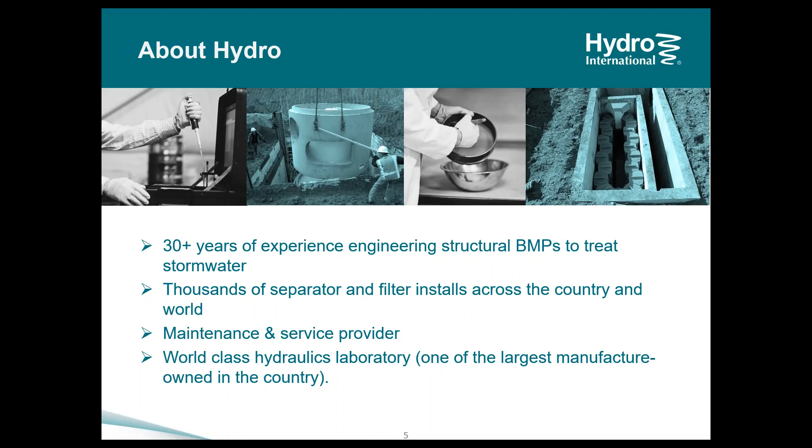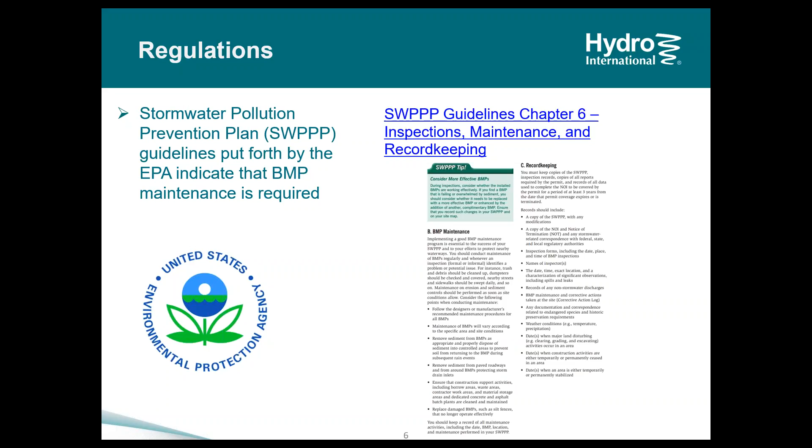So to start, as our starting point, we'll look at the Stormwater Pollution Prevention Plan, or SWPPP. These are the guidelines put forth by the EPA, indicating that BMP maintenance is required. This is to be seen specifically in Chapter 6. Now, this is often delegated by the EPA to the state or to the city or county level.

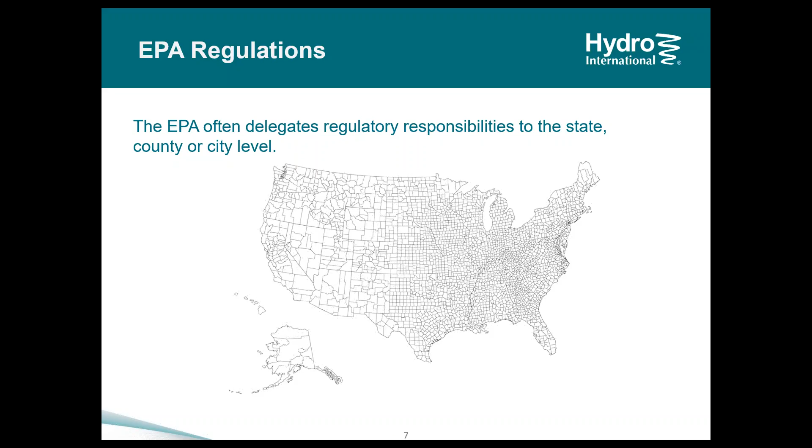So to further illustrate the point, take a look at the following six examples from the EPA Summary of State Stormwater Standards. The examples on the left are not the same level of detail as those on the right. This is just an example from the state-to-state level.

Now again, try to take a step out from your day-to-day and imagine how, as an owner, you'd be searching for answers about stormwater, and this could be confusing as to what your actual responsibilities are in terms of maintaining your BMP.

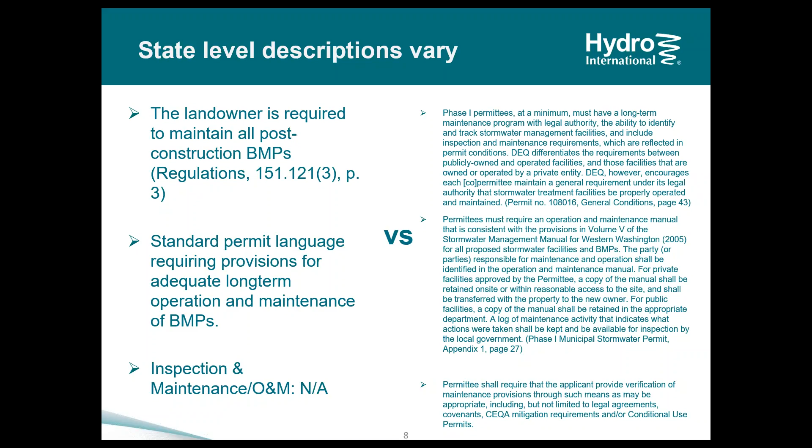Now, much of the regulatory effort is done on the front end to verify system performance. It's done prior to installation. A lot of focus is put on the site before and during construction. As a result, the audience, which in this case would be the contractor, is not necessarily the end user.

The result from that is that enforcement of post-construction BMP maintenance is in many cases reduced to a simple encouragement. And this is also communicated, or not communicated, to parties who really don't hear that message or don't really understand it. That said, stormwater BMP maintenance is not happening regularly across the board.

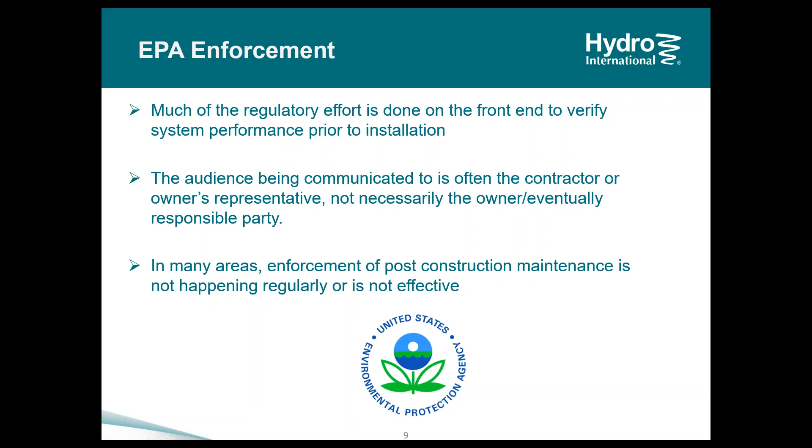A little bit of some maintenance statistics or what we have noticed. Between 6 months and 2 years, almost any stormwater treatment system that is not maintained will cease to provide any effective treatment level. In our business, we found that fewer than 5% of end users actually maintain their systems, with some numbers as low as 2%.

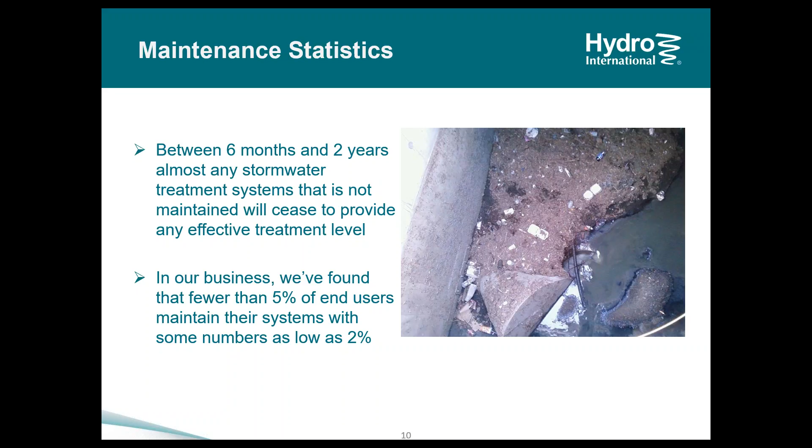Now when the maintenance is occurring, we find that that 2 to 5%, the majority of these are coming from the owners when something goes wrong, as you can imagine. Your parking lot floods and all of a sudden stormwater treatment and maintenance goes to the top of your priority list.

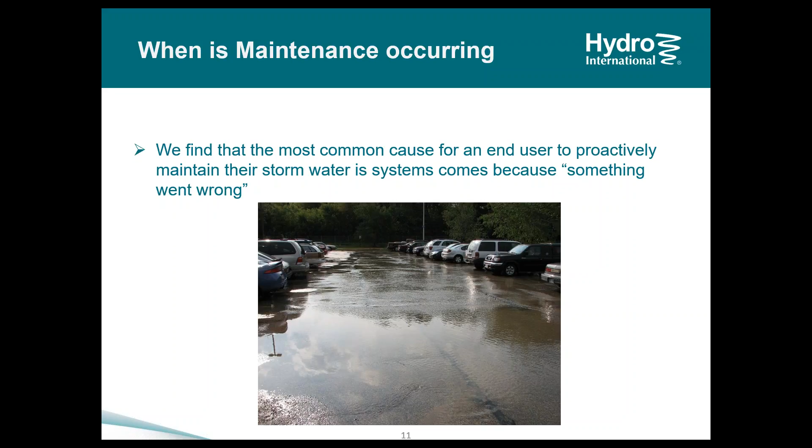The second largest reason for why we hear from owners and they're looking to maintain their systems is that they receive a violation, notice of violation or NOV.

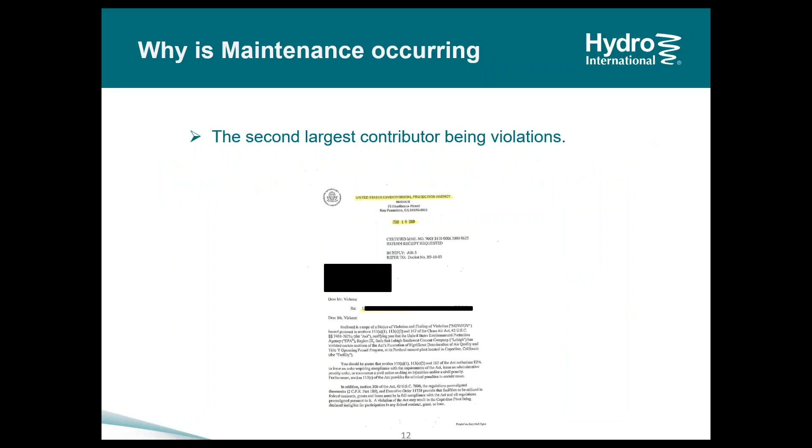The challenge itself is self-evident, probably already was before you signed up for the presentation. The issue is that stormwater systems are not being maintained in many cases. But let's take a closer look as to the why.

I've already encouraged you to take a step away from what you know and do daily. But let's take a simplified look at all the different groups and players on the stormwater board. Try to imagine what their goals and objectives are, and if they align naturally with stormwater maintenance or even the awareness. You have engineers and then contractors, developers, in some cases property managers.

Regulators enter here with the end user. These end users can be homeowners, it can be business owners of various sizes, small businesses, large multinational businesses. And you have to imagine that a homeowner's perspective and knowledge of stormwater is inherently much different from the head of, say, a public works department for a decent-sized city or municipality.

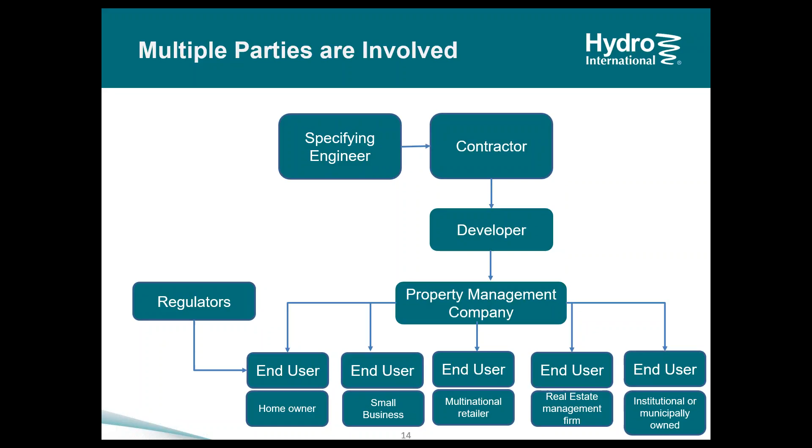So when looking at just the design, specification, and construction of a new site, there are, of course, a lot of people involved. Now, just in terms of the construction or reconstruction of a site, the stormwater can be considered something very small in scale compared to all the other aspects of what's being done. This, of course, doesn't help with the issue of communication and miscommunication about who's responsible and what's actually there once things are finished.

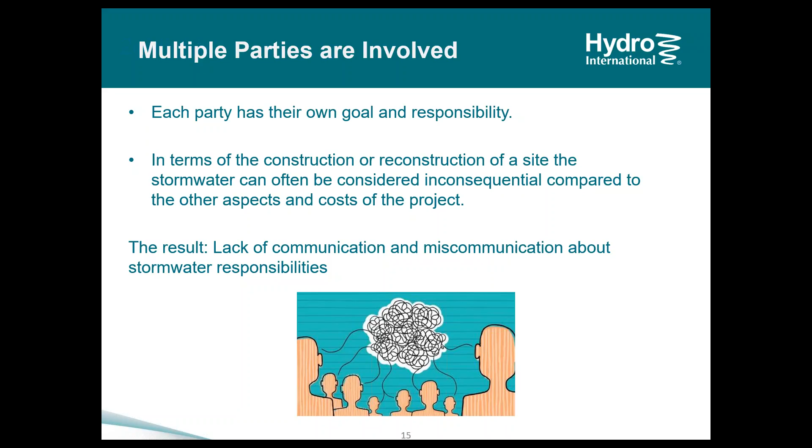So then let's fast forward to the completion of a site, take a look at the perspective of the end user or the responsible party who has the stormwater BMP or stormwater facility, and it's their responsibility to maintain that.

So these end users are from all different walks of life, from all sizes. The goal here is to look at a few examples from different areas, chosen residential setting, as well as small, medium, and large commercial settings. For this presentation, we won't deal with industrial permit sites.

Typically, these owners are actively engaged from the beginning, so we won't be looking at that. Additionally, we won't be looking at institutional or municipally owned sites. Again, these types of communities or organizations do have folks in place in regards to the overall operation and maintenance of everything, not just stormwater, but very often specific stormwater teams as well.

So that said, we will look at individuals, homeowners, an individual homeowner or homeowners association, small businesses, regional retail chains, as well as big box chains and multinational retailers.

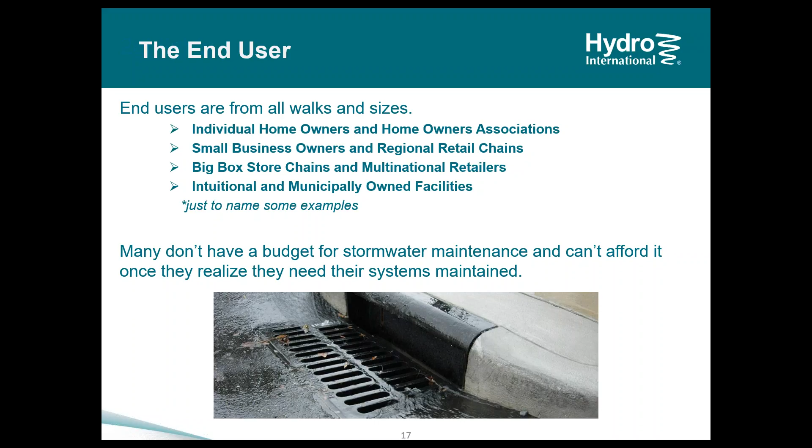So taking the story from a residential setting, these stories are sort of fictional depictions, but they're based very much on reality and things that we hear very often. But as a simple story, let's take John.

John is a proud homeowner, one of the new houses in Apple Grove community. Apple Grove is located next to one of the best schools in the district. Many young families have purchased the lots, and in fact, before completion, all of the lots are actually purchased by new homeowners. It's a very attractive area, not too dissimilar to the growing towns or suburbs and many of the areas close to many of you.

Now, the development is just finishing the third and final phase. However, the LID or low impact development and proprietary or manufactured BMPs were installed in that first phase as part of the utility construction. Now, these are several years past due on maintenance.

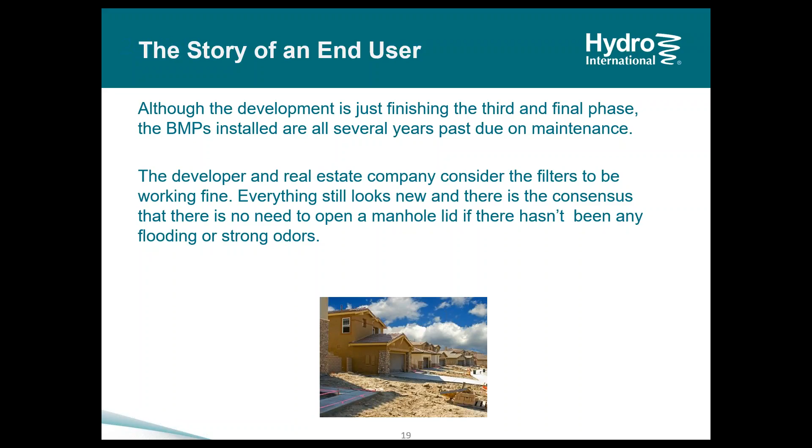Now, the developer and the real estate company consider, say, the proprietary filters or sand filters, separators, whatever it may be. They think they're working fine. Everything still looks new. There's a consensus that why would we open a manhole lid? There's no flooding. There's no strong odors coming from any of the manholes. So they let it be.

Once the development is completed, the area is handed over to the HOA. The homeowners association is now responsible for their neighborhood. After some time, John and the other homeowners receive a card from the town informing them that they're responsible for the stormwater maintenance in the development.

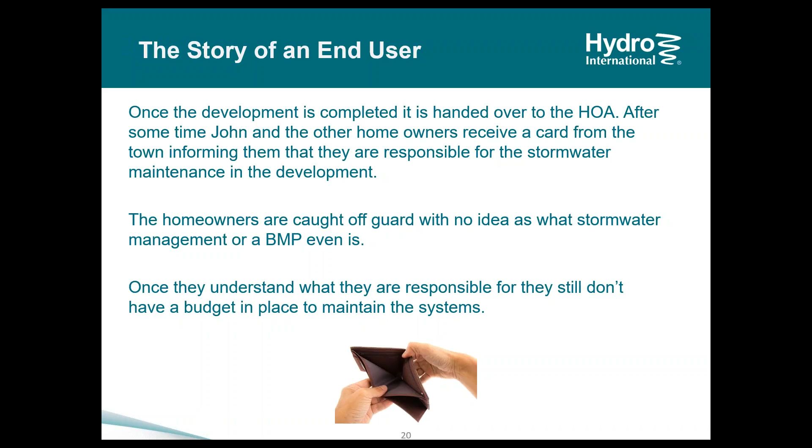Homeowners are caught off guard with no idea what stormwater management is or what a BMP is. They search around and ask, and eventually come across some paperwork that gives them a better idea of who's responsible and what's in the ground. Once they understand they're responsible, they still don't have a budget in place to maintain these systems.

After contesting over who is truly responsible for stormwater maintenance, they'll go back to the developer to see if they're responsible. What will eventually happen, though, is that a service will be contracted and conducted.

Now the cost of doing this is greater since several years have gone by, and there hasn't been any good housekeeping practices employed in the meantime, aside from your typical lawn care, mulching, and mowing.

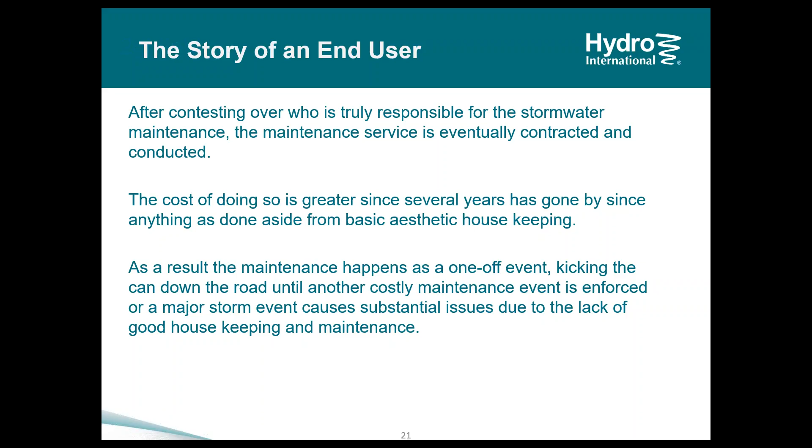As a result, the maintenance does happen, but it happens as a one-time event. This is kicking the can down the road until another costly maintenance event is enforced, or a major storm event causes substantial issues due to the lack of good housekeeping and maintenance.

That's not to say there aren't examples of diligent property owners and property management companies who are aware of their stormwater regulations and have budgeted and prepared for inspections and operational services. These examples are most common with property management firms, as these operational costs are part of their business, so they have a budget in place to handle this. This, however, is not the majority in the residential setting.

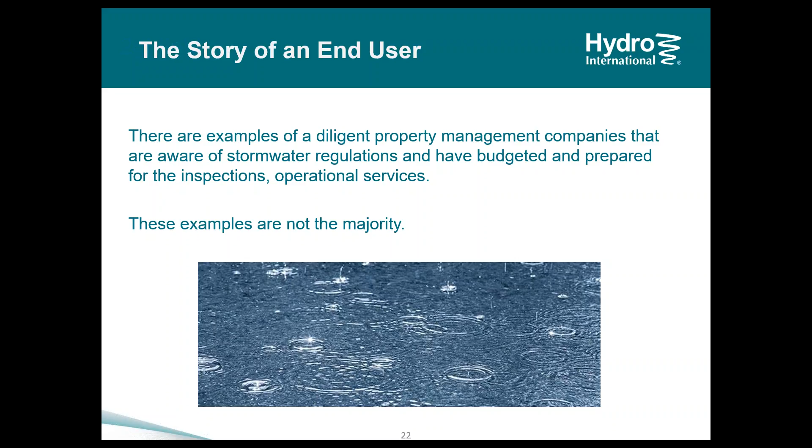So let's jump now to a small business setting. Let's take a look at Sam. Sam owns a local bagel shop. All of his money is invested in the shop, and his annual expense budget is already figured out.

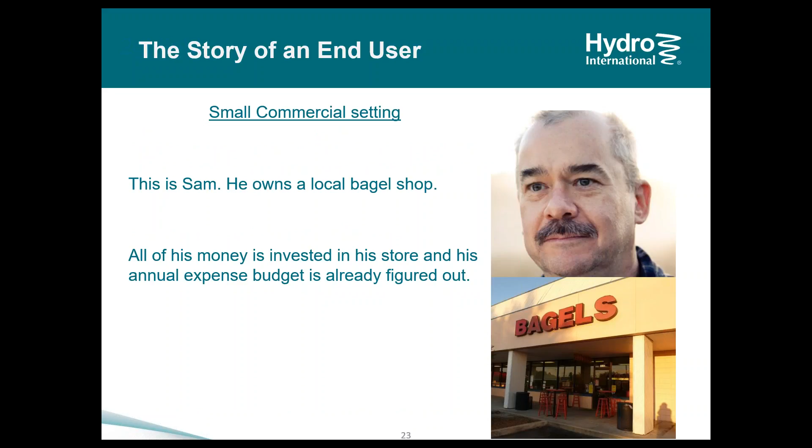One day, Sam receives a notice of violation, an NOV. At this point, the story starts to go the same way, and like the homeowners, Sam has a lot of questions.

Now let's say Sam has a gray or manufactured system. His questions are namely, I have a what? You'd have to imagine that a hydrodynamic separator is not part of the vocabulary of a bagel baker.

After he asks what do I have exactly, he probably asks why didn't I know about this? He then probably asks what is stormwater treatment, and what is a stormwater treatment system? Why does it have to be maintained, and why is it not self-maintained? What does maintenance even mean? And finally, how much is it going to cost me?

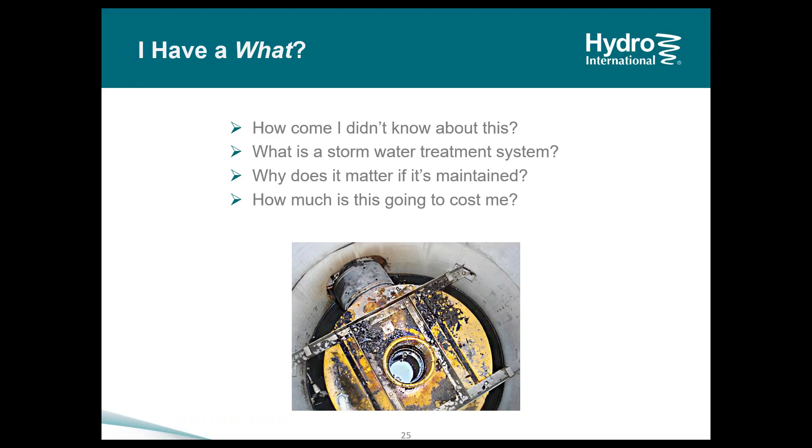Now let's say Sam has a green or low impact system on site. The benefit is that this isn't underground and therefore not out of sight, out of mind, so to speak. But his questions aren't too much different. I have a what? But we mulch and we mow around the signs out front, there's no pond out back, it's just trees.

This is something we hear quite a bit. Folks don't know they actually do have a pond on site, had a pond for years. You can show them the plans and they'll still contest that they don't have one, because these ponds aren't maintained. In addition, Sam may ask, stormwater treatment, what kind of treatment? This is nature, something similar to maintaining a ditch, what does that even mean? And of course, how much is this going to cost me?

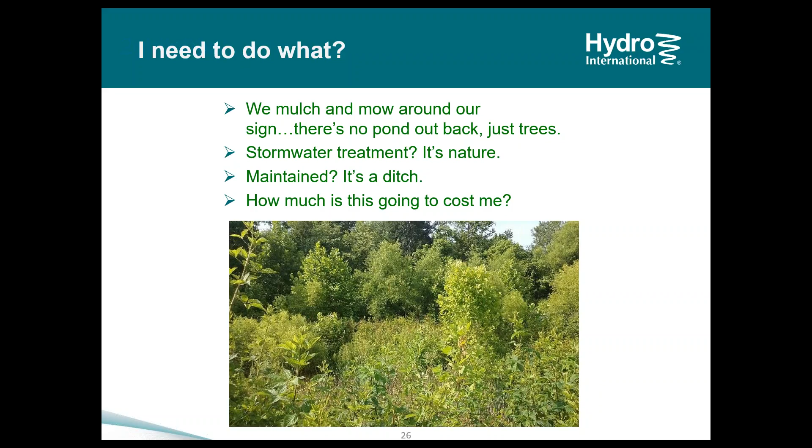Now Sam, similar to the HOA, will go and argue with the firm he rents from about who exactly is responsible for the stormwater systems. Not having a budget for this kind of operating expense, maintenance will get done, but it will be a one-time event, unless or until the local regulating bodies circle back around and tell Sam it's time.

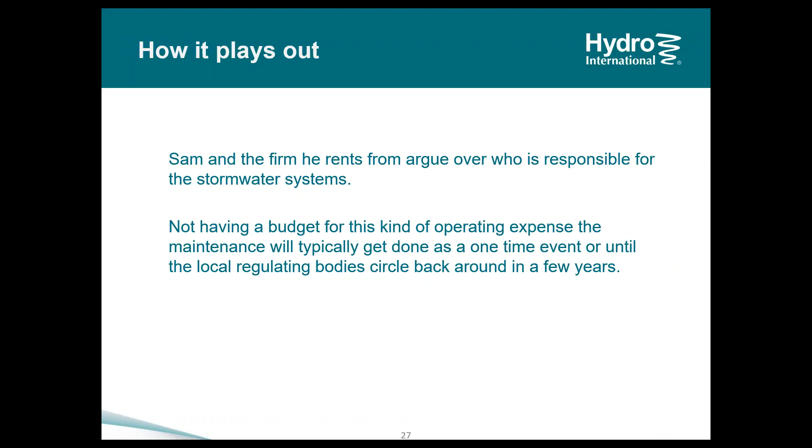Let's take another step here and put ourselves in the shoes of a scenario involving a small or medium-sized business.

You can probably think of a few examples in your local areas, companies that came out of the recession strong, helped the local area get back on its feet, and created a lot of jobs. We've seen pretty often that this ends up being c-stores, convenience stores, gas stations, things of that nature.

So let's take one that's expanded across a good portion of the state, has started expanding into other states, and is doing relatively well.

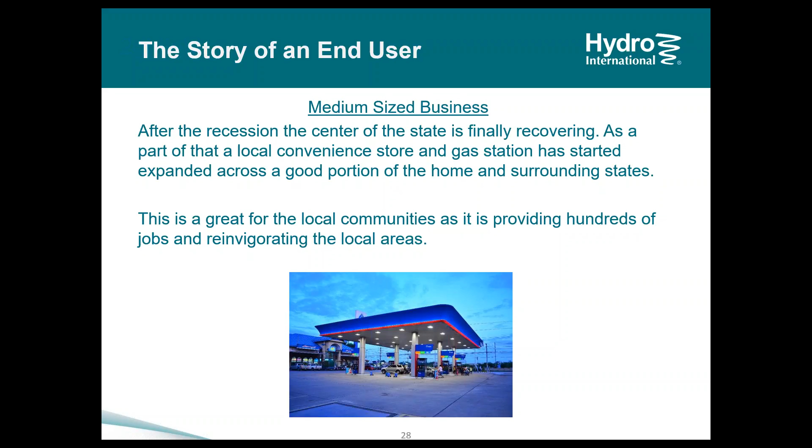As part of that, multiple locations are being built all at the same time. This growth is due in large part to a partnership between the design and construction process, streamlining what's going into these sites, and it's helping to allow growth and expansion.

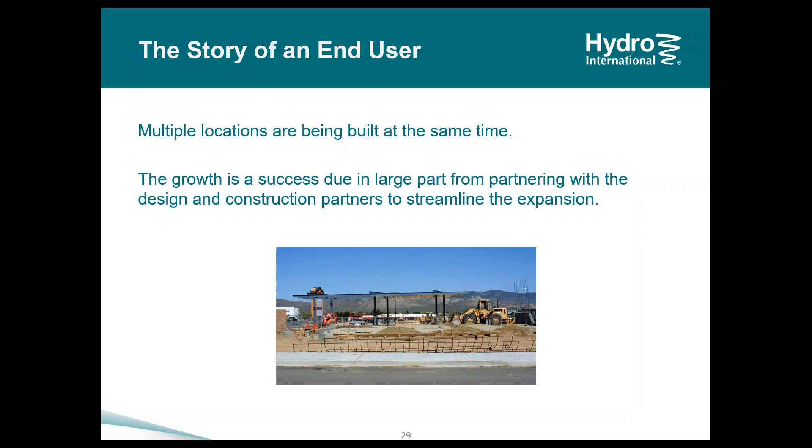So the first series of construction locations now are going about one, two, three years with occupancy. And as part of that, they're gas stations.

Very often they may have a proprietary filter system. These filters are no longer effectively treating runoff, as it's been several years. And what was designed as a small retention pond out back is now a series of overgrown shrubs and bushes.

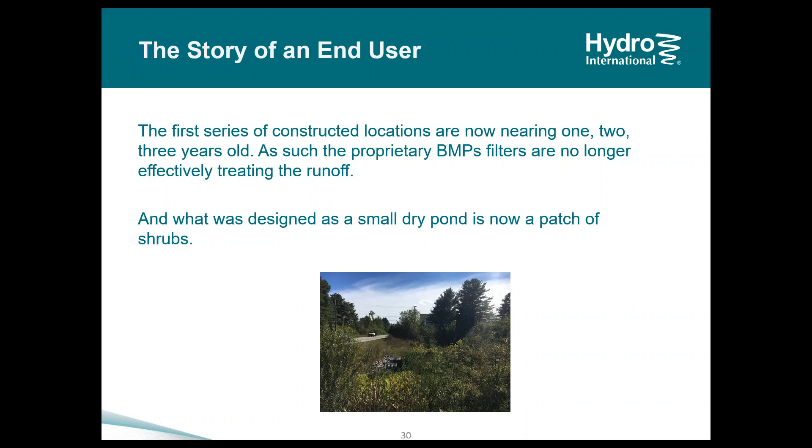Now, there may not have been any notices or notifications from the local body, but the regional construction distributor, who was part of that streamlined building process, reaches out to the construction manager and offers to supply the proprietary filter replacements.

Or anything else that may need to be purchased to maintain the systems on site.

Now, you can probably guess the response, or the lack of a response, at first. The construction manager is simply not interested in replacing or servicing stormwater systems.

That's quite frankly not his goal. His goal is to get these stores built and keep costs down. The only potential unbudgeted expense he's concerned with is the potential for an oil spill that needs to be cleaned up. Not even in his line of sight is rainwater.

Now, again, this is not to discredit the responsible business chains out there that plan and maintain for stormwater. For some of these companies out there, they've received an NOV or two.

With that violation, they said, okay, enough's enough, and they've overhauled their system and their budget, and they treat their stores and they maintain their stores.

For others, maybe they are trying to promote increased sales through their green initiatives. Stormwater falls in line with that, and they're being proactive.

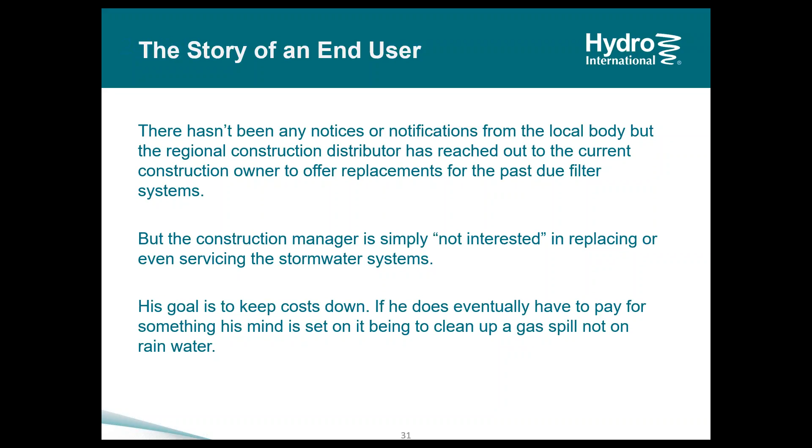So my point is that it's not to say that there are not companies out there that are maintaining, but again, the point is that there are not very many of them that are.

And for our last example, from a commercial setting, let's take a large box store, large retailer.

Typically, these retailers will be fined. They'll receive notices of violations. They're seen as having the funds to comply, even if they haven't budgeted for it. So they end up receiving violations.

Now, in response to a violation, this large retailer will bid out maintenance on all of their stores nationwide.

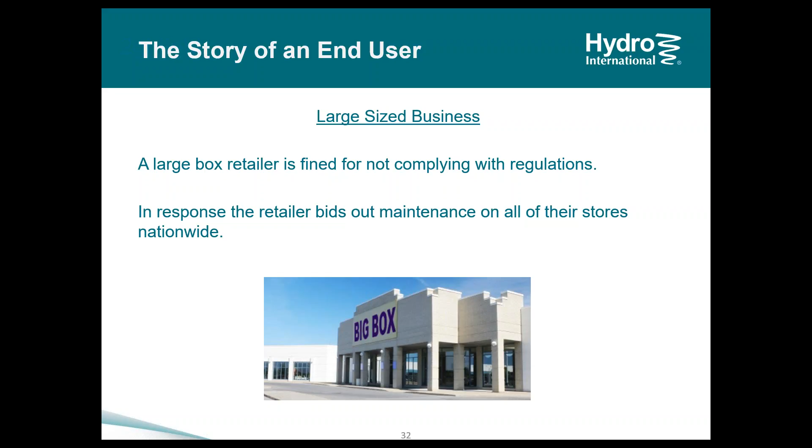And after a year or so of maintenance, not connected in any way, it's completely unrelated, but perhaps there's some consecutive quarters of down sales.

So the result of that is that the stormwater contracts are either done away with completely, or they're downgraded to aesthetics, to mulching and landscaping the front of the stores, anything to save costs, and so therefore this has become secondary.

Now, the maintenance contractors in response will try to maintain their contracts. It's probably a sizable amount of the work they do. They'll try to keep on maintaining these systems, but they won't get any cooperation from the corporate office or from the individual stores or regional managers.

And this will continue until this large retailer receives another violation at some point in the future.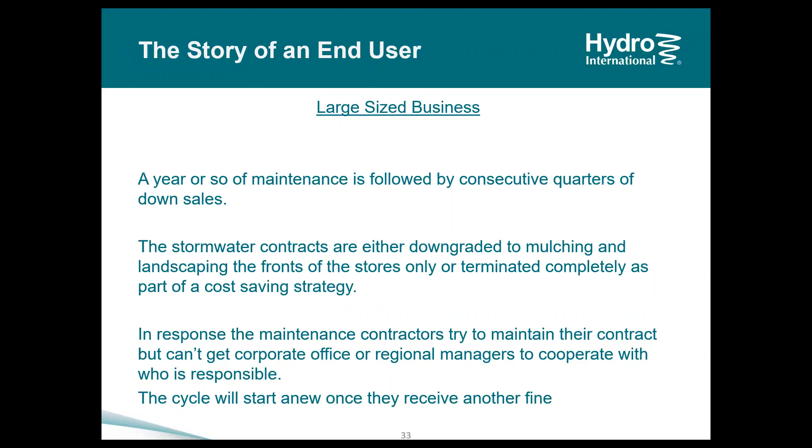Now, the difference with that is they're okay with the violation. They're okay with paying the fine and doing just enough to get by. That's because continuous stormwater service on all their sites may be more expensive, considering their footprint, than paying a few fines as they come up or maintaining a store here or there.

Now, as a side note, it may be easy to point the finger at large retailers, and that's really not the intent. In fact, if you were to look for a site that's probably not in compliance, it may not look like it at first view.

The parking lots are always well paved, have seal coats, freshly lined, and look very clean, especially considering the size.

But what you may not notice, unless you really look at what's there, is that there is a large amount of trash usually in these larger parking lots, these larger stores. Catch basins will collect no short number of cups and wrappers.

But in addition to that, if you talk to any maintenance companies who've ever worked on these types of locations, they'll be the first to tell you that the basins and separators and units installed on these sites are some of the dirtiest they see. And there's a few reasons for that.

One reason most folks don't think about, but is most interesting, is illicit discharges that come from campers. If you've ever driven past any of these big retailers, especially between state parks or in rural areas, campers tend to park there overnight, and stormwater catch basins tend to get used as individual or personal septic tank disposals. So there are things that go on completely out of the realm of many folks who are specifying or putting together these systems, but they're happening nonetheless.

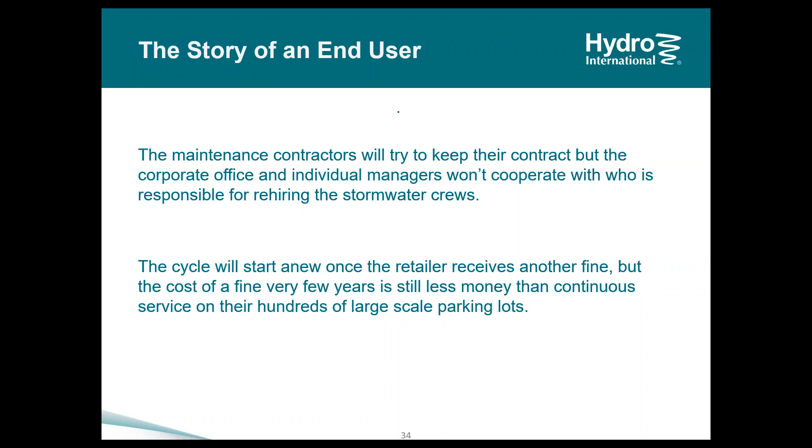So the question now is, it's getting better, right? Well, the answer is yes. This isn't all supposed to be doom and gloom. It is getting better. However, these things don't happen overnight.

Awareness is growing and it needs to grow. We, as a company, are seeing an increased approach from owners asking us about their obligations and what they need to do to clean their systems. I will admit this is a very small percentage, and that those who do come to us have almost no frame of reference for what they actually have.

They've seen the manufacturer's name on the manhole lid, and they know nothing more. They don't have a SWPPP. They don't know what they're responsible for. They do know that they have to do something, but they don't know much more. But this is something we can all build off of.

Now, to get started, to build off that, we need to recognize that regulations do not equal enforcement. Within a state, the regulations may be very progressive in terms of stormwater quality and what's expected, but the enforcement of that is another issue completely.

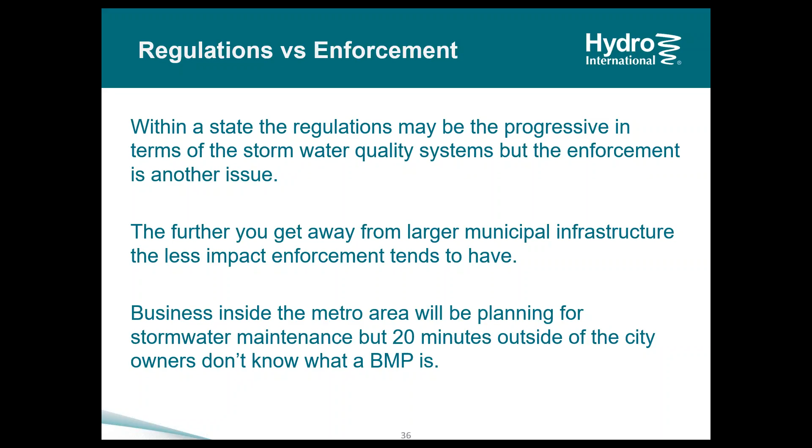This may not be something new to many of you, but we find that the further away you get from a large metro area and a large municipal infrastructure, the less impact enforcement tends to have. Many of you can probably identify that in your own states, where in some city areas there are very progressive systems in place and maintenance is being done, but you only have to drive 20 minutes outside of town and no one's ever heard of what a BMP is, even though all of their properties have them.

Now, the other thing here is to recognize the difference between forced compliance and voluntary compliance. Does maintenance cost money? Yes, it does. But spreading awareness of this across the various responsible parties helps to manage expectations. People won't be blindsided by this.

Most folks do want to do the right thing. They do want to maintain their systems. They just need to know about it.

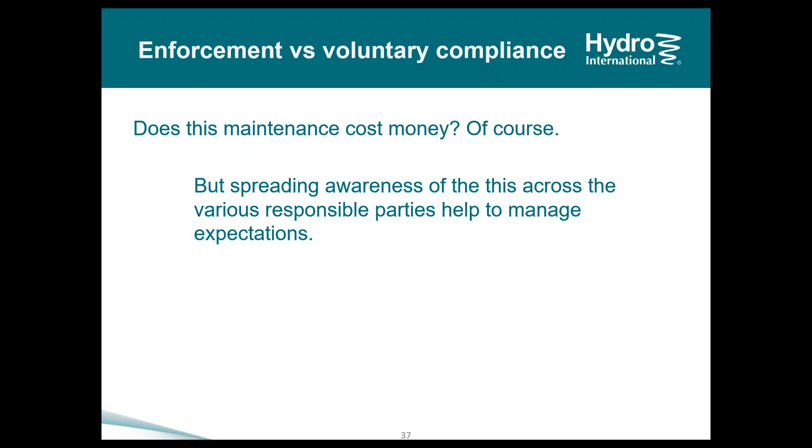Just think of the last time, the look on the last person's face who you explained stormwater treatment to. You can almost envision the moment when the light bulb goes off for them, where they connect all the dots about how serious and how interconnected everything is with the storm drain. So think about that, and think that inherently, people do want to do the right thing.

So what most of you are probably pretty curious about from this session is, how does it work exactly? The how on maintenance.

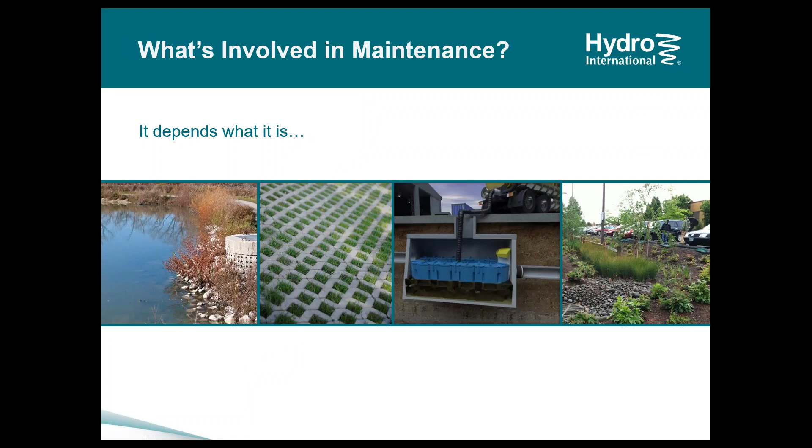That actually depends on what it is. There's no shortage of different types of treatments for stormwater, and so depending on what that is will depend on the how and the what. So what's involved, again depending on what it is, could be anything from simple housekeeping practices, mowing, de-weeding of areas, to heavy machinery.

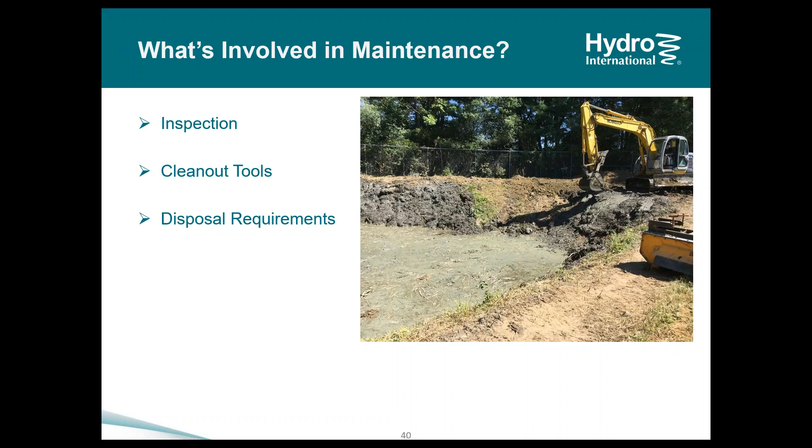So to break it down a little bit more, let's look at three primary parts here: the inspection, the tools or equipment, and disposal and the other things that go along with a maintenance service. So these will be the three things.

So we'll start with an inspection. The inspection is key. Now, most plans will say that a site should be inspected within the first year at varying intervals, anything from every 2 weeks to every 6 months to once a year, depending on what the system is, what the regulations are, what the engineer has suggested and recommended. What we find is that when owners do contact a manufacturer or service provider and ask what they need to do, it's usually well beyond that 6-month window that most manufacturers or regulators suggest for at least your first substantial inspection.

Now, the inspection itself is key in determining a few things. First, the current condition of the BMP facilities, which should help to estimate the maintenance frequency. By measuring the sumps, inspecting inlets and outlets for blockage, you can get an idea of how often this should be done and what to expect when having to do a maintenance service.

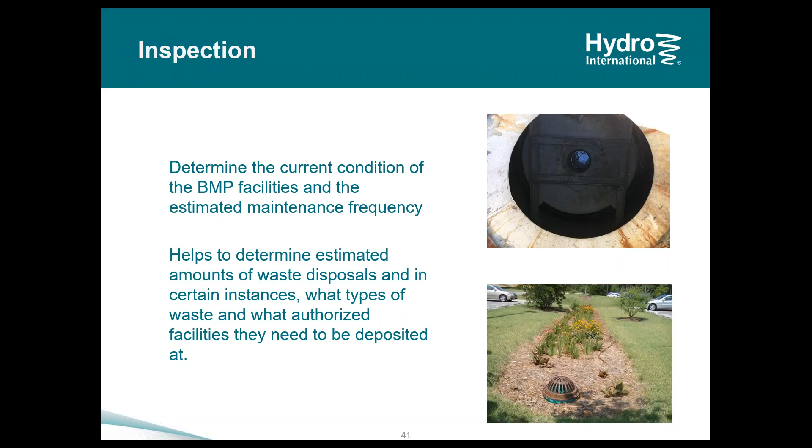Now, it will also help to determine the estimated amounts of waste disposal, and in some instances, help determine what types of waste are there and what authorized facilities these need to be disposed at. This primarily applies to multi-sector general permits. These will often need to have a profile done on the liquids and the solids to find out what is hazardous, and if so, with what metal or whatever else may be in there, to know where it can be deposited properly at the right authorized facility. Again, that's usually an industrial setting, but that can happen in other settings, so it's something to be mindful of.

So let's talk a little bit about the tools. There's a wide array of tools and equipment. The one thing I'd like to point out that's pretty important is that good housekeeping practices are the less expensive option. By doing maintenance consistently, you save yourself from having to do more intrusive work that has to be done from serious neglect. We'll look at that in a moment when we look at specific types of BMP maintenance. But if it helps, think of it as getting teeth cleanings every six months as opposed to getting a root canal after a couple of years of not maintaining your teeth.

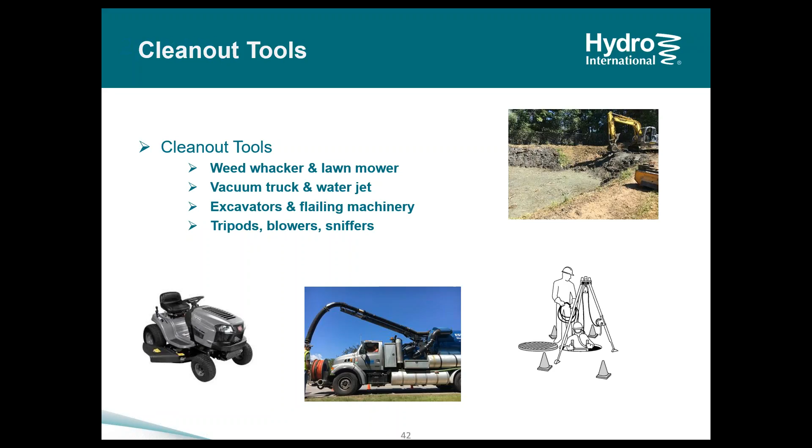So less expensive and less painful for stormwater in the same way. Tools can be what you'd consider landscaping or professional grade landscaping equipment — ride-on lawnmowers, weed whackers, things of that nature. But then we're also talking about vacuum trucks, the ability to water jet. If maintenance hasn't been performed regularly, you're talking about excavators and flailing machinery, even cranes to pull things out of the ground. In many cases for filtration units, you're talking about having to get into a unit, which involves confined space entry, tripods, blowers, sniffers, and everything entailed with safely entering a confined space.

So what exactly is involved in maintenance? Let's take our first example of a dry pond. We're only going to take a few examples here of some of the more common types of BMP maintenance, but I encourage you, if you have questions on specific types of systems that you specify or that you see in your areas, to reach out, and we can talk about those as well.

As a dry pond example, mowing and clearing brush, you want to make sure there's no blockage to the drains. Much of this work can be done while landscaping activities are being conducted. Commercial clients will tend to do this anyway, provided the pond is visible to the public. You will see quite a bit of ponds that are tucked away behind the loading bays or into the backs of stores. Again, out of sight, out of mind. They do not get the same type of treatment.

Now, another key point here is that basins, separators, and other units and gray structures typically will feed into these ponds. So these need to be cleaned out routinely as well. Everything's interconnected here, so the lack of maintenance on the catch basins leading to the pond will just shorten the time in between more substantial maintenance that needs to be done on the pond.

Also, good housekeeping practices that can be done at the same time as typical landscaping jobs and other aspects of a property — these are things that can be done within a day's work very often, depending on the scope or size of a pond. But when a pond is neglected and needs more substantial work, you're talking about days or weeks of work. So again, taking the idea of what needs to be done, what type of price can go along with that to the client, what types of expectations they have going on, if it's an area that will interrupt business — these things should all factor into why they should be done more regularly.

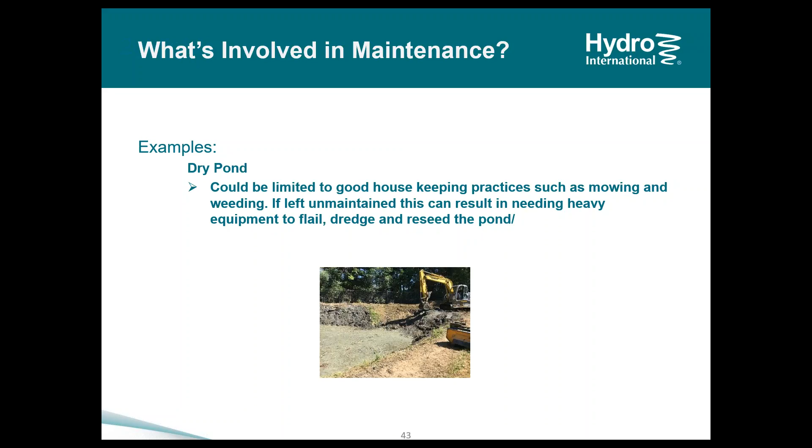Let's take another example, hydrodynamic separators. Now, if these are maintained regularly, this is limited to Vactor cleanouts and disposal of the pollutants and sediments.

We recommend in many areas to try to do this in the spring. If it's an area that salts and sands roads for the winter, you can try to Vactor that up. Also, in areas where you'll have a lot of leaves falling in the autumn season, you want to try to get those out of the basins before winter sets in. So you can do this seasonally.

The same type of work done on hydrodynamic separators can also be done at the same time you're doing your catch basins. It's important to clean all your systems at the same time, make sure everything's done at once. It doesn't make sense for a client to have one system or part of a system cleaned and have someone come back and do another part later, unless an inspection report shows it should be on that sort of cycle.

Now, what happens with hydrodynamic separators or units in the ground, gray systems or proprietary systems that have been neglected for years? They can become very damaged, to the extent that, depending on what the unit is, where it is, and the types of load it bears, it can have the need to be excavated out. Depending on where this is placed, it can interrupt business. It's obviously much more substantial work that needs to be done if you need to pull a unit out of the ground as opposed to vactoring out the sump.

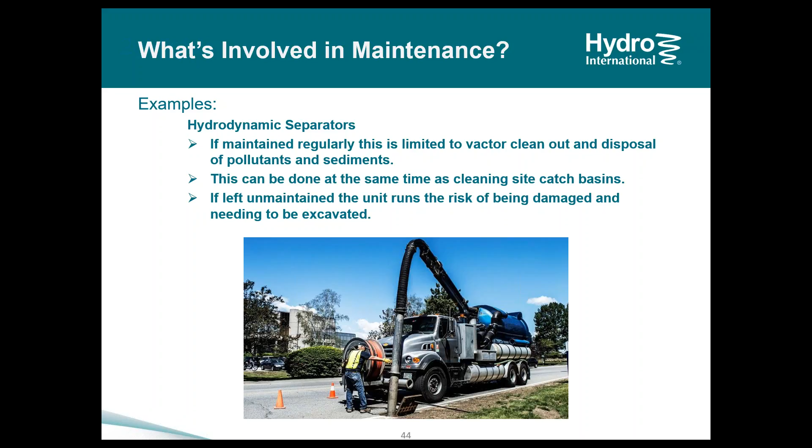Another example I would like to briefly highlight the maintenance practices on are both manufactured filters, or proprietary filters, and non-proprietary, or your sort of standard sand filters.

If maintained regularly, there's a few things that need to be done: jetting, vactoring, removing and disposing of the pollutants. This can be the top layers of sand. If these are proprietary units, it can be the cartridges or packs that are part of those systems.

Now, very often, whether proprietary or non-proprietary, this will involve confined space entry. Folks will need to get into the hole, so to speak, and clean these out. So owners, the more they know about this, understand that there is something that goes into this. This isn't just somebody showing up with a truck and doing work. You need to have support, you need to have tripods, you need to have extra laborers there to monitor. That expectation, painting that picture early, is very helpful so people understand exactly what that is.

They don't understand these systems. They don't see them the same way we do on a daily basis, and so they don't understand. It's under the ground and it's not something they think of. All the same, if these systems are not treated properly, it can lead to issues with flooding, primarily depending on the type of system it is, and there can be some extent of excavating or essentially rebuilding the system.

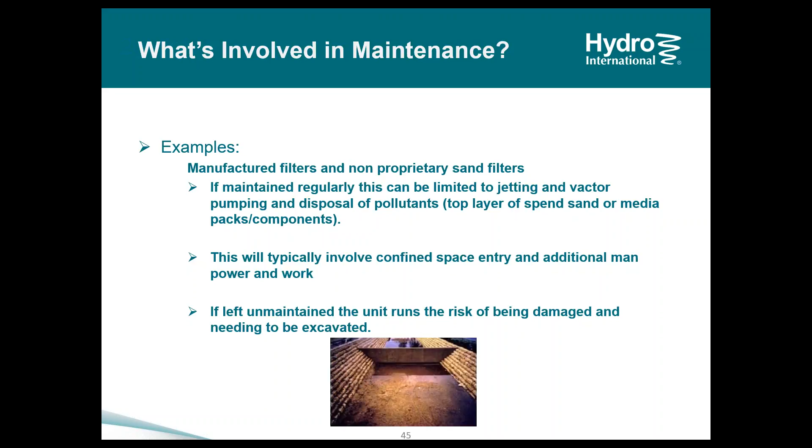So that would maybe lead you to ask, what should I look for in a service provider? We would recommend someone who understands stormwater systems. A Vactor truck does not make you a stormwater maintenance company. You would want somebody with the ability to do or maintain everything on site, or at the very least to understand everything on site. Stormwater systems, as you know, are interconnected, so the maintenance of them should be done by a single source where possible.

Or at the very least, if you have multiple companies doing different things, some green systems can be done by experienced landscaping companies with an environmental focus. They should be on the same page with companies that will do the Vactor work of catch basins and things on site, having them work together and knowing that these systems are interconnected.

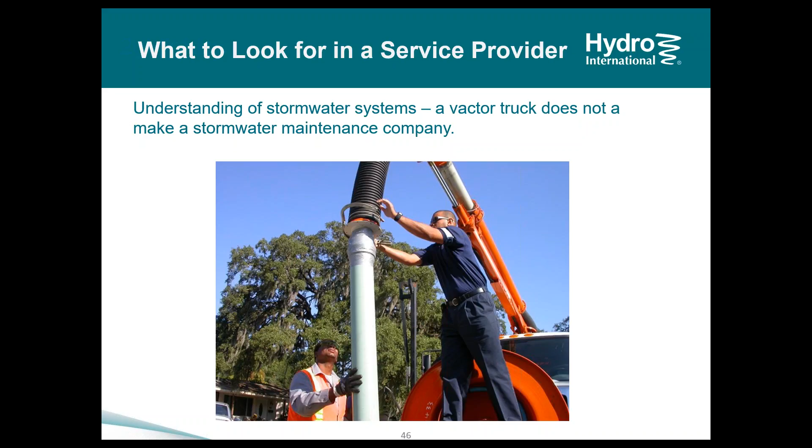Now, as I mentioned, a Vactor truck does not make you a stormwater maintenance company. There are plenty of waste disposal companies, earth contractors, industrial plumbing, oil and grease companies that have Vactor trucks, and depending on the market, they will try to supplement their work by treating stormwater systems, which is perfectly fine, provided you are aware and comfortable with their level of expertise in that field.

We do very often get calls in from clients who have used, so to speak, budget companies from different industries and have not been happy afterwards, mainly because their inspection reports or things they need to produce afterwards for local bodies are not up to par for what is expected.

So if you are going to recommend someone, just be confident in their abilities. I'd like to take the other side of that as well and mention that even if you don't have a Vactor truck, that doesn't mean you're not a stormwater company. There are plenty of landscaping firms that specialize in maintaining swales, ponds, and green and LID systems. So they are out there. If you want to work with them, try to also work with someone they're comfortable with in terms of vactoring and gray systems and other work that can't be done with typical equipment. But ideally, you can find a company that can do all of that.

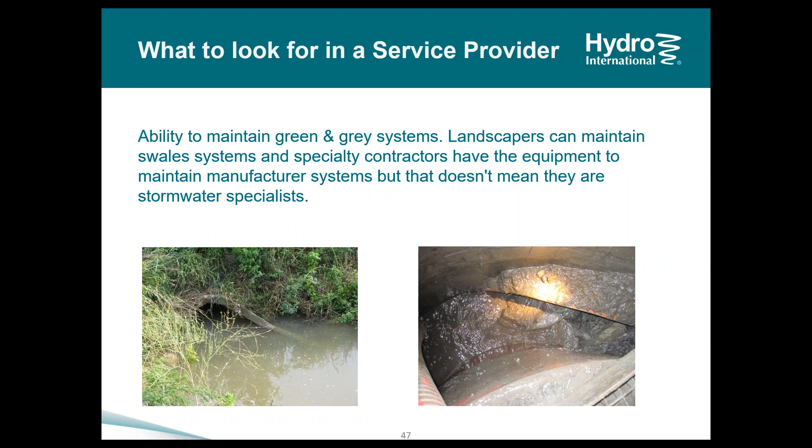So where's your role in this? How can you help, or at the very least, what can you keep in mind in terms of water quality?

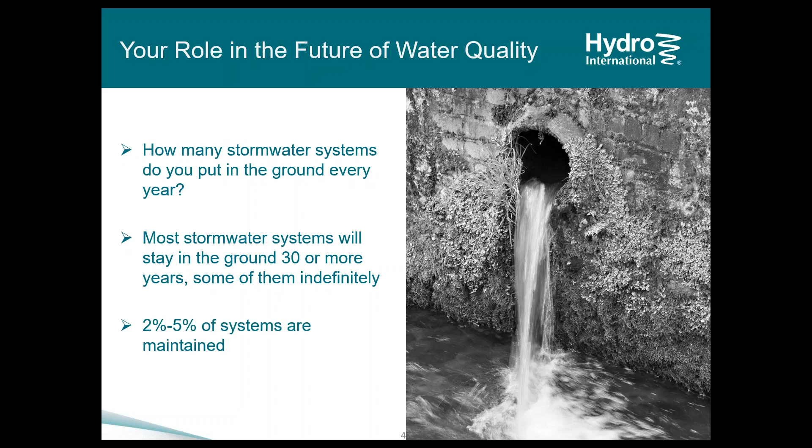Try to think about how many stormwater systems you specify or put in the ground every year. Keep in mind that these systems will stay in the ground for maybe 30 years or indefinitely, and remember that only 2 to 5% of systems are probably maintained.

So your choice does matter every time you talk to someone, whether it's your specific client or anyone else. What you're able to share and the decisions you make do have an impact.

So things you can do specifically: whenever possible, try to get the end user's contact information. Send them the operations manuals if you've specified a proprietary piece of equipment. If it's a non-proprietary system, such as a pond, send them links to the local maintenance manuals or specifications from the local state or body, so they have an understanding of that.

Educate the contractor on the legal obligations his clients have to maintain the system. Contractors want to get their CO, get the job done right, and get off site, and that's their business, that's to be expected. But everyone needs to be on the same page that although that's what they're paid to do, there's another aspect here at play, and these systems need to be maintained after the fact. That needs to get passed on, since you may not be in direct contact with the prime contractor, general contractor, or the owner.

It's worth noting, and this may not be news to anyone, but many local regulators don't know exactly what they have in terms of BMPs. They don't know what exactly is in the ground in their area. They have an idea of maybe ones that have been in for 5, 10 years, but things before that, maybe not.

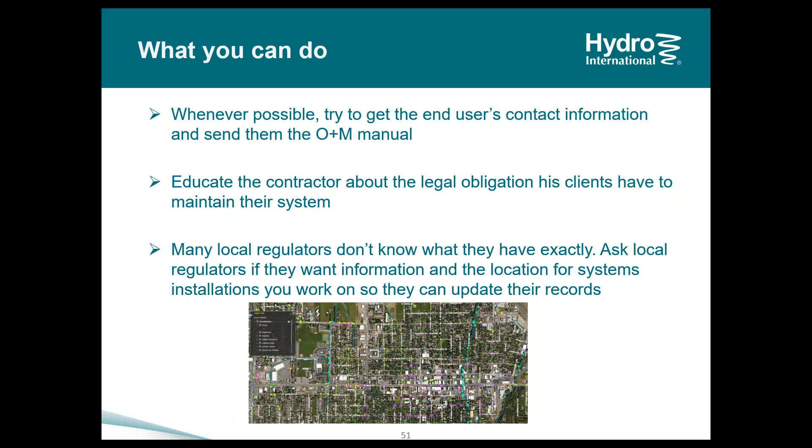Something else you can do is work with those already in the industry. As I mentioned, Vector trucks get associated with stormwater treatment because they pump out catch basins and separators and the like. But Vector trucks are not exclusive to the stormwater industry, and if you were someone responsible for a unit and tried an internet search to find someone with Vactor truck capability, there's no set term to use.

It can be an environmental company, but that could be a waste company. It could be stormwater, but maybe not somebody with the Vactor truck. It could be a plumbing company. There's really a lot of variance in the wording used and the capabilities of companies. Any good company will promote that they can do multiple things, even if it's not their specialty. So reach out to those in your area, get to know them, their capabilities, what they're comfortable doing, and what types of units they've maintained in the past.

So proactively reach out to those in your area. Be ready to make a recommendation for a third-party inspector and or maintenance provider. Ideally, the more you communicate with the different players in the construction of a site and the installation of a BMP, the more this will be asked, and be ready to suggest someone.

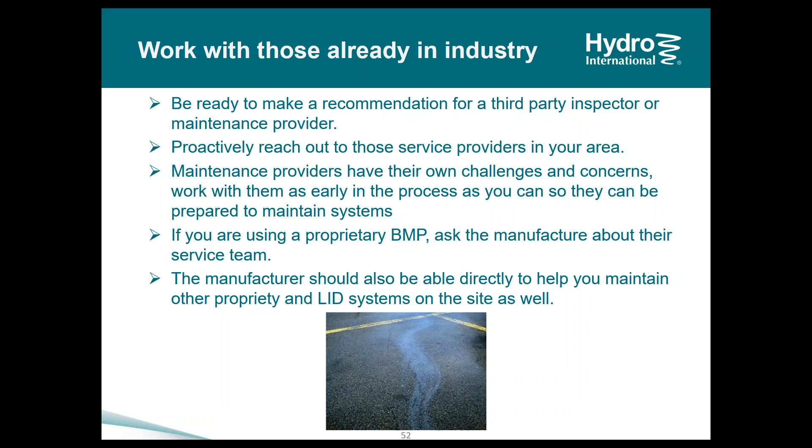So an ounce of prevention—not that many of you aren't already out there doing this—but just stop and pause. Remember to go out of your way to reach out to not just the community, but also think about your client and how to best service your client by actively engaging them and imparting on them the importance of stormwater maintenance, and that there's costs associated with that. If you are looking out for your client, the longer it goes by without maintenance, the more environmental and financial harm to the community and to them. So just try to pause from time to time and think of that, and try to give more information. More information is always better than less.

Because of all the parties involved in approving, manufacturing, installing, and maintaining stormwater systems, every one of these groups has their own priorities, their own responsibilities, their own people they report to or are servicing or supplying. So with that, you get a greater gap between the operational maintenance, which of course leads to the greater cost of maintenance. That's because there's so many people at play here and so many people have different things to focus on. So again, anything you can do to make connections and get everyone on the same page—it's a collaborative process, but it's something that can happen and we see happen. It's just, it can happen more.

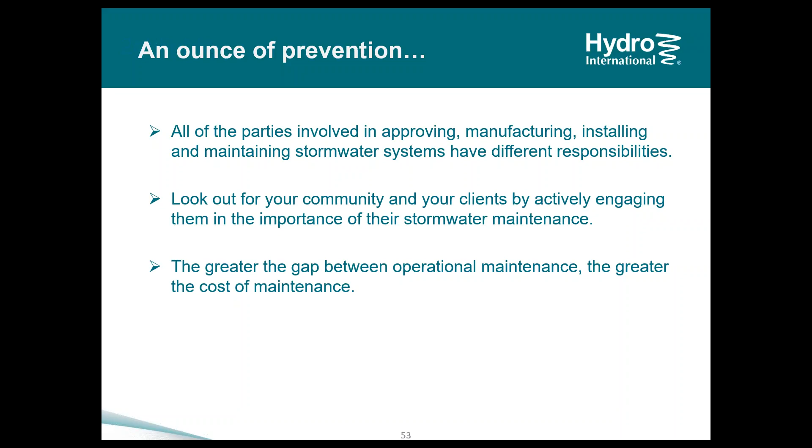So in terms of if you are a specifying engineer, what you can try to keep in mind—again, this is where you're able to do this—but try to be mindful and try to do a few of these things. One of them is to keep in mind about unit placement. Now, obviously, units are placed where they need to be placed, but units placed in the middle of a busy road, it's a safety concern. Even contractors who do maintenance, contracted to do stormwater maintenance, it's a safety issue for them.

So it hinders their ability to inspect and maintain. But if you have a site where the owner is capable and would like to at least do the inspections themselves, having it in a busy road area obviously hinders them from doing so. Keep in mind as well, if a site is there and that's where it has to be, of course that's fine, but keep in mind as well then whenever that needs to be maintained, there needs to be permits in place to close off roads and things like that as well. So that can change cost.

Now we also, where you can, try to make sure that the units are accessible. Inaccessible units create a challenge in maintaining, of course. A few examples that we see out in the field, and sometimes on plans, are units that are sometimes inside parking structures. Again, maybe these need to be here. It does create issues with Vactor trucks accessing those, as well as units that are put into green spaces with no access roads nearby. If they're on the back end of a pond, how does the truck get over there? Things like this have to be taken into account. And again, if I can try to bring the point home, more detail is better than less.

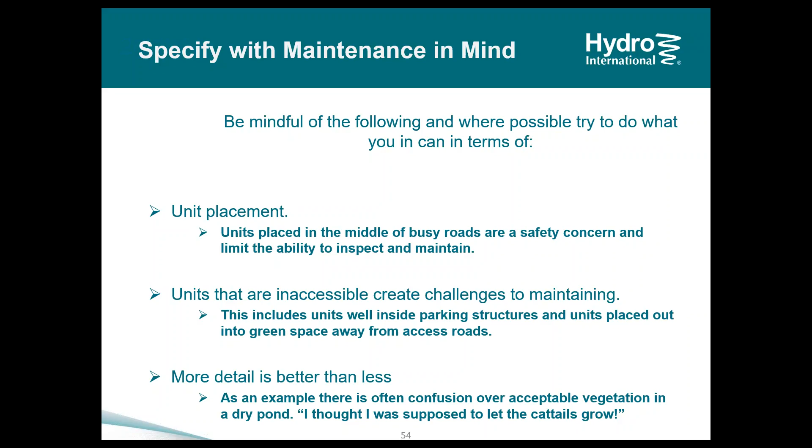So trying to specify with maintenance in mind, we do find that the end user who does reach out to a maintenance company or manufacturer typically does not have their stormwater pollution prevention plan. They honestly don't know what a SWPPP is in most cases, excluding industrial clients who do know. Most folks don't know what that is.

Now, they will more often than not have their construction plans. So although not always 100% accurate, it will show them more or less where the drainage is, how many basins, and things like that.

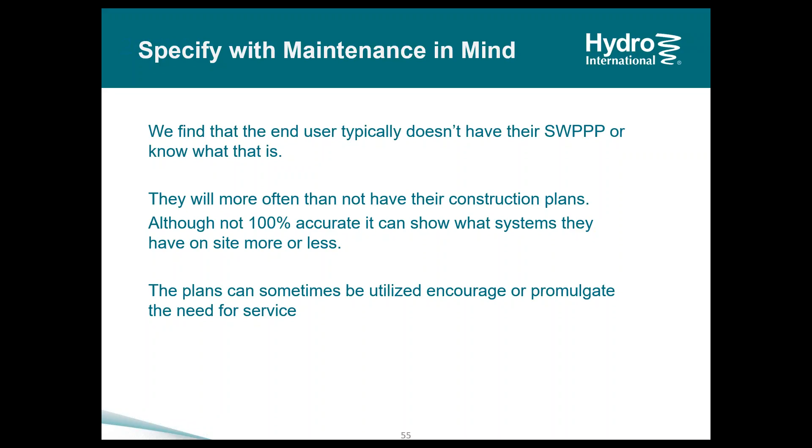Now, what you can do to help is put anything on the plans that says there's a unit here and this unit will need to be maintained. These things help. We see plans that state this, that state units will need to be maintained, and we see plans that make no mention. So whatever you can do, wherever you can communicate, take advantage of that and do so.

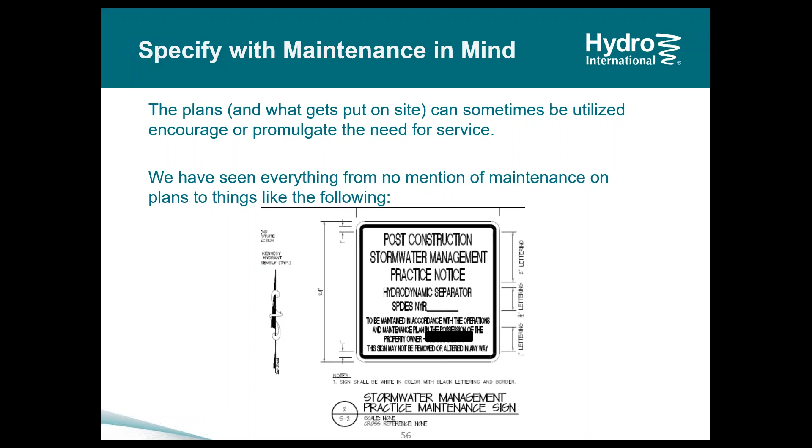Just as an example, this is something we've seen, one of many examples. If you can encourage or announce that there is a unit there, even though it's underground, with a sign that says what the permit is and that it needs to be maintained—does that make it maintained? No, not necessarily, but it is a step in the right direction. So anything you can do.

Other than that, what do you think? We need to work collaboratively on this. So how can these different parties at play—engineers, contractors, maintenance companies, manufacturers—how can everyone collectively make a difference? How can we further drive home the need for maintenance to occur more regularly, not only when absolutely necessary and in rare instances? And what have you found that works for you in your areas?

Again, the hope here is to give some insight about the different players in different regions. But all of you know what's going on in your own backyard and what's working for you and what isn't. There will be a survey at the end of this, so at that point we'd encourage you to give that sort of feedback.

In terms of next steps, there really isn't a single answer to increase maintenance awareness or occurrence. But a small amount of insight into what's going through the heads of the different people, their responsibilities, and their goals and targets, should help open the doors to collaboration, or at the very least give you some insight in terms of how best to communicate and try to make this happen.